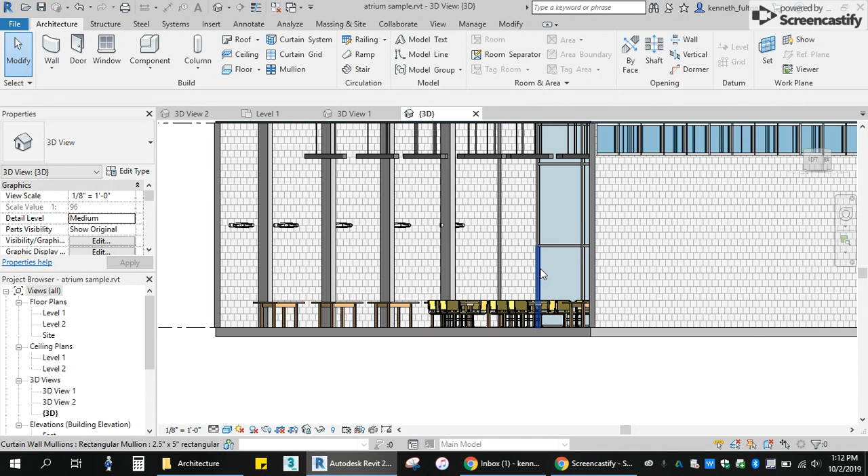All right, so I got this little project set up as a mock-up of what you guys are working on, so I can see some of the problems you might be dealing with. I've got my building set up facing the right direction, because that's going to matter when we start to render sunlight. These double glass windows here, that curtain wall, I didn't add the doors, but you get the idea. That's facing east, same direction our school is facing.

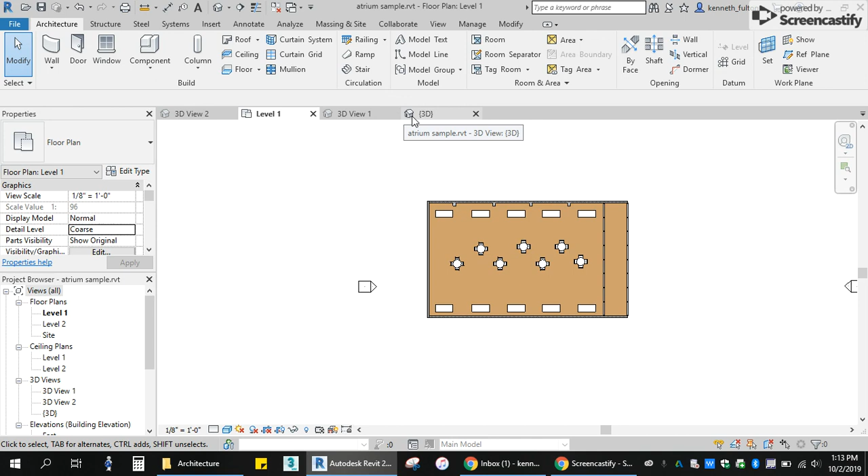So that's going to give a realistic view of what our light should look like as it comes into this building. I opened up this wall—there is a wall there, it's just not shown in this view, because I don't want light or sunlight coming in this way. I just want to get a good rendering of what it's going to look like over here.

So I've got a couple good camera views set up here, and I want you to try to find good strategic angles for your setup. I've got my lights placed, and I've got windows up here, which is pretty accurate—pretty close, anyways, to what we have in our atrium.

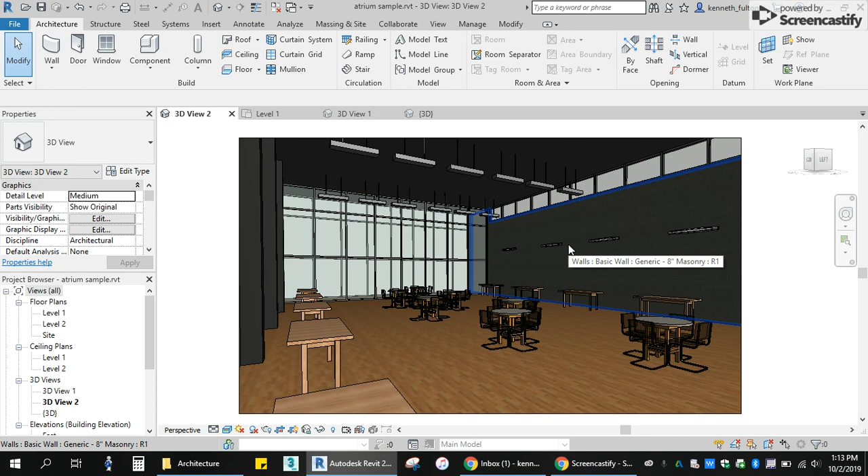Lights up on top. That's one of the things I like least about this program—you never know how to apply these lights. Depending on what kind of light they are, they're only going to apply to certain surfaces, and doing it in certain views. So some of these I had to go in and add into a 3D view, which feels kind of weird and clumsy.

So I've rotated these. These were typically vertical, and I turned them horizontal, kind of like what we have.

So what I want to do is get a good rendering, a good view of what this should look like now. If I go down here and show the rendering dialog, I'll click on that. Right now it's just going to show—I'm going to do interior. We have light and sunlight that should be showing, so I'm going to do sun and artificial, interior.

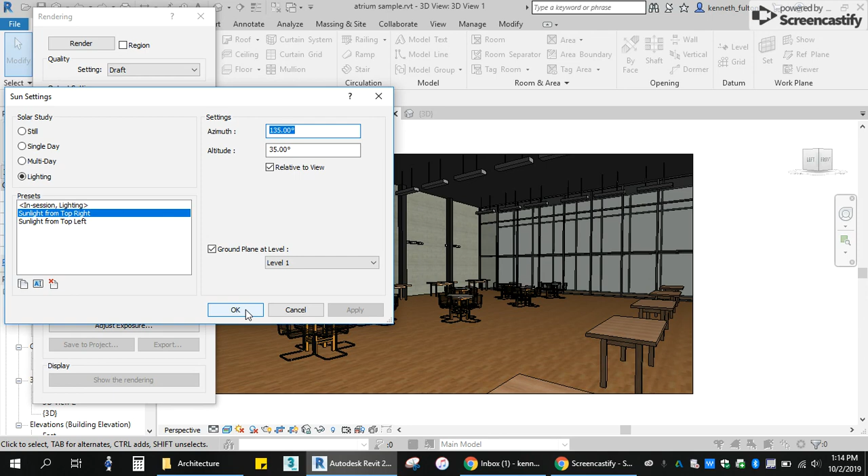I have the sun coming from the top right. You can change that here if you wanted to, or change the angle of the sun if you wanted to do that. Artificial lights—when you click on that, I have all my lights show up here.

It's a lot of lights, and I think some of those don't exist anymore—I probably deleted some. These up here, one is as high as you can make your lights go, so 0 to 1 is the range, and it's either on or off, basically.

Your background—you can have the sky showing no clouds, few clouds, whatever, a certain color, or an image if you want to throw an image in the background. I'm just going to go with the look as if there were few clouds in the sky.

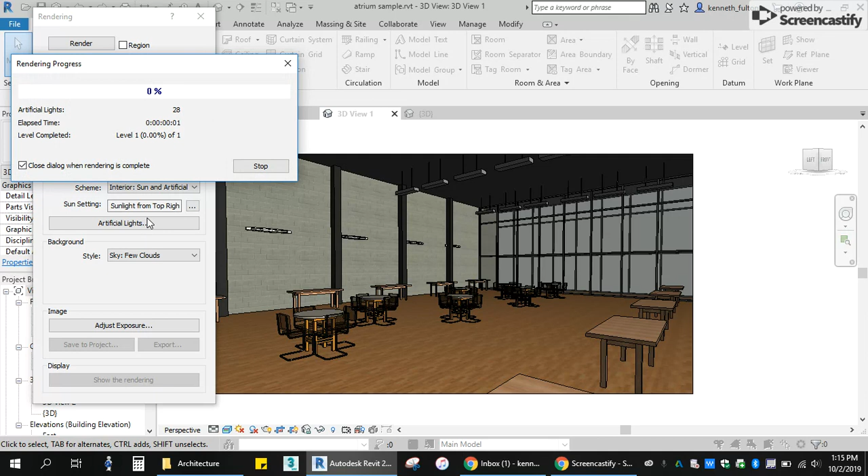I'm going to have it set to draft for right now, and I'm going to click render and see what this looks like. It's going to take a little bit of time, and it's going to be pixelated for a while since it's draft. I just want to get a good look at what is showing and what's not showing.

So I can see here that these lights are on. I'm getting light from those skylights up there on the top side, and I'm getting light from up here too. So there's some things I can change.

I can adjust the exposure. If that's too bright, you can adjust the exposure here and make it darker or brighter, however you feel it needs to be changed.

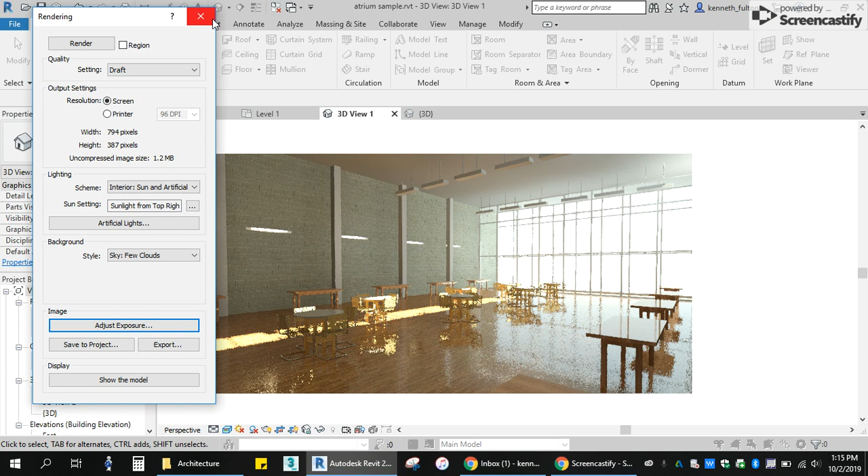I also notice that these lights up here don't appear to be on, and that could be a problem because I want it to look as accurate as possible. So something I can do for that is make sure those lights are actually on and that the sunlight isn't just drowning them out.

So if I go back in here to my rendering view, I'm going to turn off the sun, just do artificial lights only, and see what that looks like. Let's see what this looks like now. A little bit darker scene, it's like it's nighttime now.

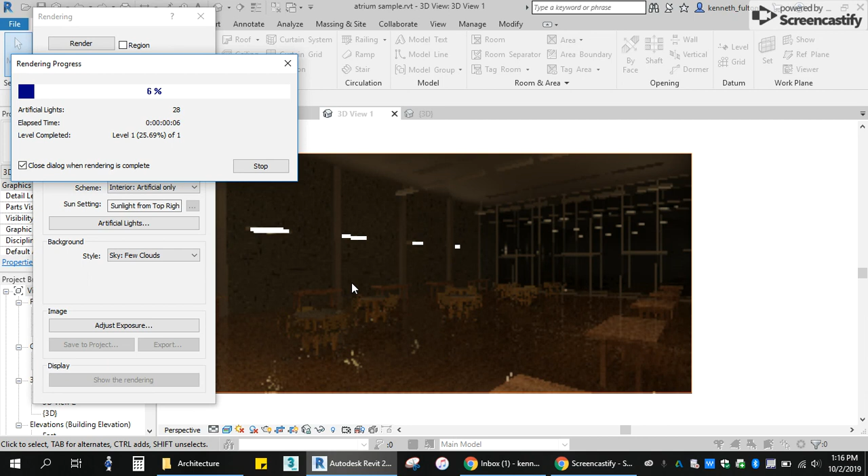I've got lights showing on the back wall, I can tell already. These lights up here don't appear to be on, but notice over here in the window, I can see the reflections of the light and the effects of the light showing up in the actual scene. They're just not showing up here. That's kind of weird.

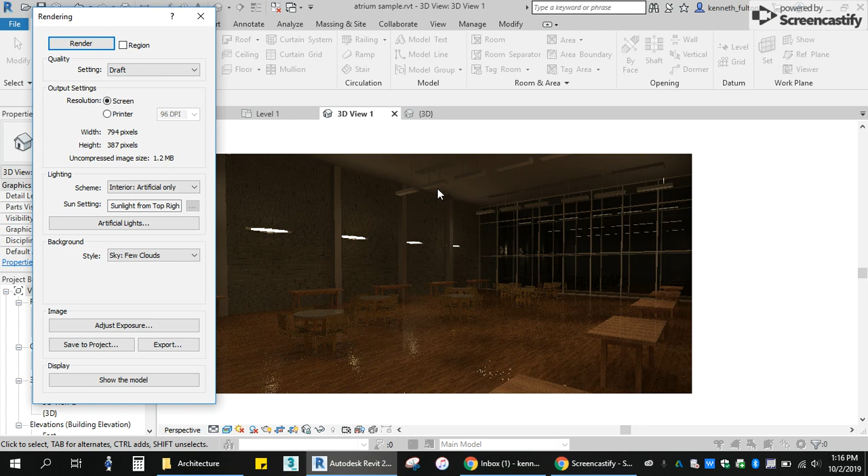I'm going to turn that off and select one of these lights. You might have the same kind of problem. For that particular light, I'm going to scroll down, and this is where you can change how much wattage, how bright you want that light to be. It's 65 watts, which is probably fine — those lights aren't too bright up there.

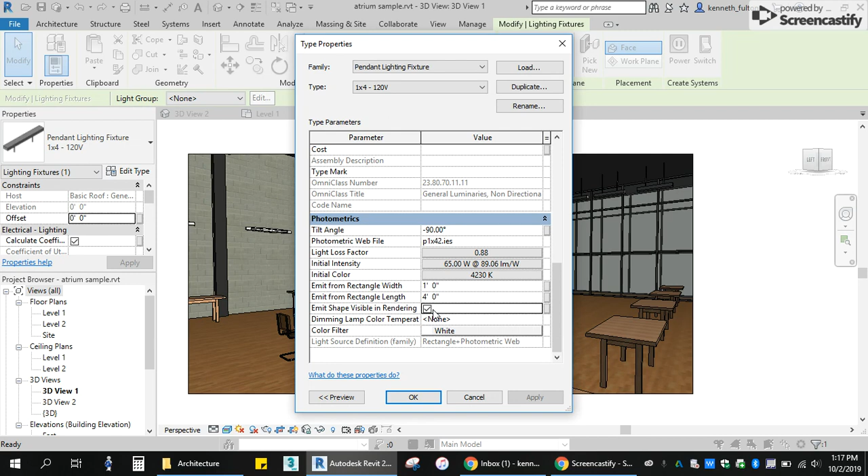But what I notice here, it says 'emit shape visible in rendering.' So that means nothing is showing up — this box isn't checked by default. I'm going to check it, hit apply, okay, and render that again to see what that looks like. Artificial only again, just to check.

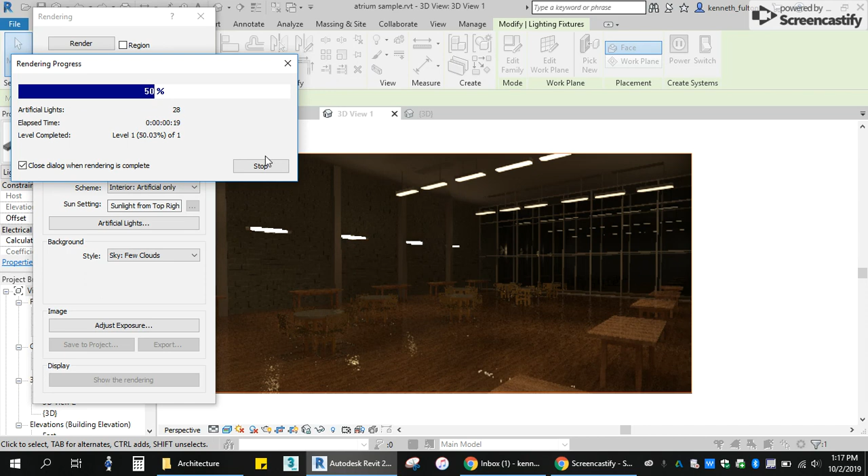And waiting... and oh, there we go. All right, so here's what it looks like — nighttime, got the lights on. If I feel it's too dark, I can go in there again, select the light, change the brightness of it, and so on. So this is a good example of how you can change those lights.

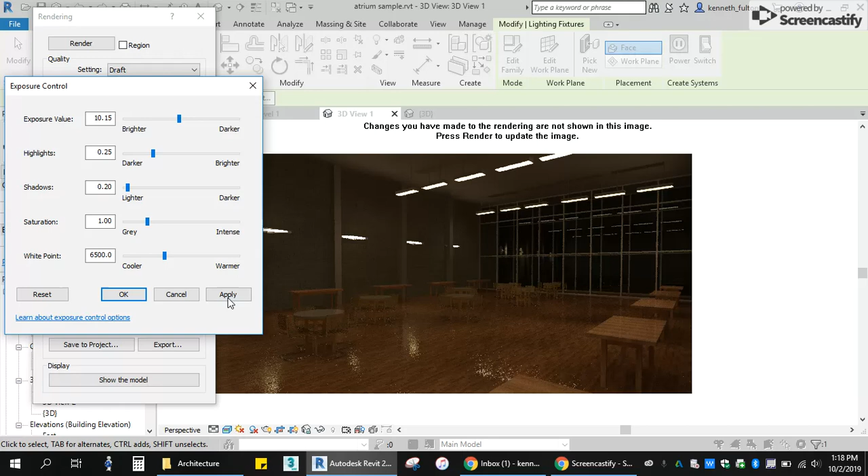Now, if I want to check it out with sun and artificial, I'm going to adjust the exposure a little bit, maybe make it a little bit darker. Whoa, that jumps really fast — there's no in between. There we go. Apply that, okay, and render this out. Let's see what this looks like now.

Kind of tones down the brightness a little bit. I can see the lights are now on up on top, and I can see the lights on the walls. So these don't seem as bright now because the sunlight is coming in, kind of overexposing it a little bit. So you can kind of mess around with this as well.

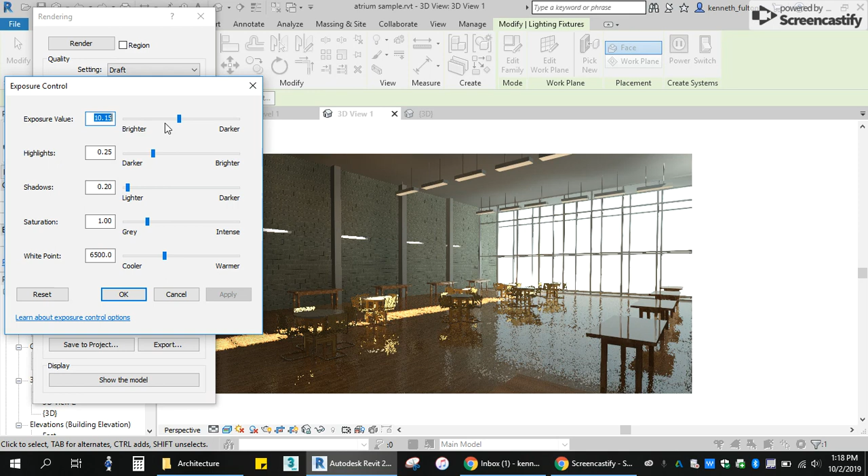Some of the other things here: white point — these very white, brightest parts of your rendering, if that seems too cold or too warm, you can change it here. Saturation is basically the colors — if you want it more vibrant and intense, change that. Shadows, you can lighten or darken them. Same thing with highlights. You can also change this to make it darker or brighter, however you feel you need to change it.

So check that out and get some good renderings of your light. Once you get a good setting that you enjoy, then change this up here and go for best renderings for your different views. Really check over it and make sure you're getting it as accurate as possible as far as your lights and the effects you're getting from your lights and the sunlight as well.